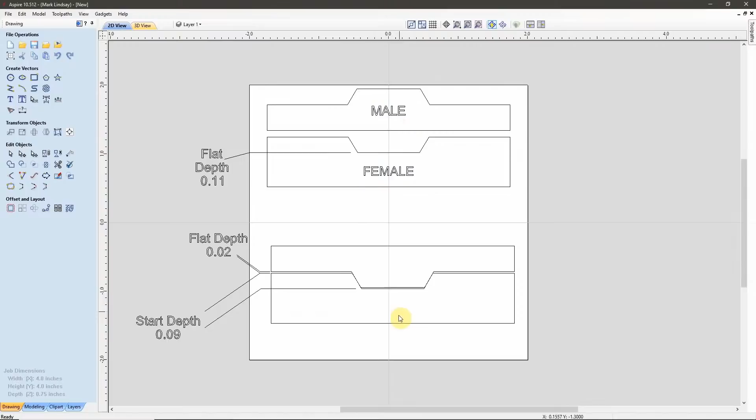The thing to remember is the only pieces of this inlay that are actually glued together are these angled surfaces here that are created by the V-bit. These are the only surfaces that actually make contact. These gaps here down on the bottom of the female and at the top over here on the sides serve 2 functions. Number 1, they provide clearance so that this surface of the male portion of the inlay and this surface of the male portion of the inlay do not make contact and interfere with this portion of the inlay seating itself fully within the female. So these gaps are created to keep these surfaces away from the female.

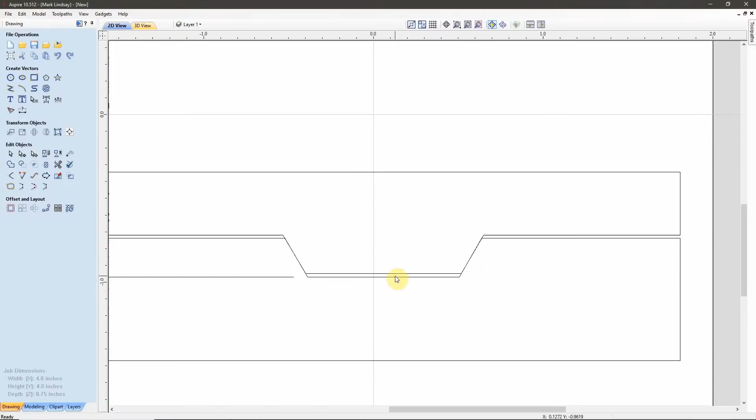They also serve a secondary function in that they're an escape route for excess glue. Glue being a liquid can't be compressed, so it has to have an escape route. It has to have somewhere to go. Otherwise, we won't get a snug fit. So, by having these gaps up here at the top, any glue up here close to the top surface will squeeze out in this direction, and any glue down here closer to the bottom will be squeezed down into this little well formed by these gaps.

Where the confusion comes in is how to create these gaps and what measurements to use. Well, in my case, with the material for the male portion of my inlay only being 1/8 of an inch thick, I need to leave a little bit of material here so that I have something to clamp into the female when I go to clamp these together.

So I have decided that a flat depth of 0.11 within the female will give me enough of an inlay surface that these surfaces here will make full contact, and there will be enough meat, if you will, to make it a secure inlay. And it'll still leave me enough material here on my male to clamp together. So that has determined the flat depth of my female, 0.11 inches.

Now, how did I determine the width of my gap? Well, I didn't. Those who have gone before us in creating VCarve inlays have experimented with various gap widths here, and by mutual agreement, they all agree that 0.02 of a gap here and here is more than sufficient to allow the glue to squeeze out, yet keep the surfaces of the male portion of the inlay from interfering with making full contact on these angled portions of the inlay.

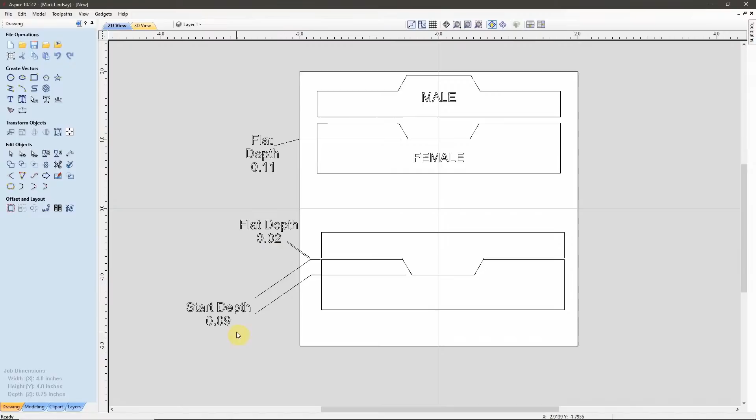So, from here, it's simple math. I want to use a flat depth on my female portion of 0.11. I want to keep a gap of 0.02. 11 minus 2 is 9. That means that I'm going to have 0.09 of an inch of material measured from the top surface down to the bottom of the male portion. That's how much material is actually going to be inlaid. So, 0.09 plus 0.02 is 0.11.

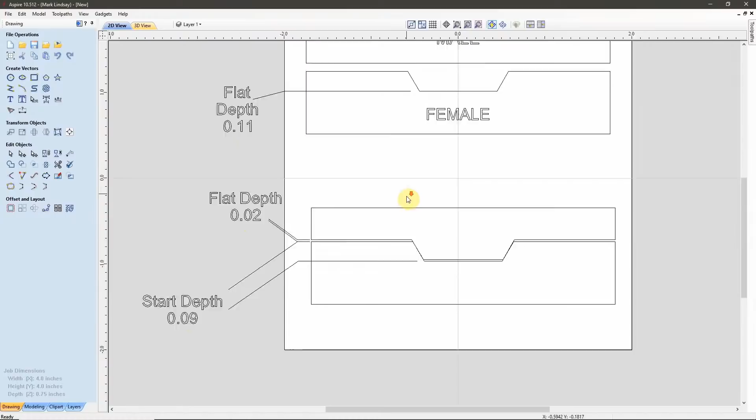This will become critical when we go to do the male portion of the inlay. For right now, in designing the female portion of the inlay, we only need to know our flat depth. So let's go back over to our female portion and let's start the toolpath. For that, we'll select all of the vectors, go over to the Toolpath tab, and I'll do a simple V-carve.

I want my start depth to be 0. So I'll set that to 0.0, and I want to carve to a flat depth of 0.11 of an inch. I'm going to use a 60-degree V-bit for this inlay. I want to use a standard bit that I know and that I've used before, so I'm not learning a technique and a tool at the same time.

I'm going to use clearance tools because I want to clear out as much of this inside here as possible. Now I have some large areas and I have some smaller areas. So for the large areas, just for speed, I'm going to use a 1/4 inch end mill. And if I select that end mill, I'm going to ramp in the plunge moves over a distance of 1/2 inch just to make life easier on the bit and on the machine.

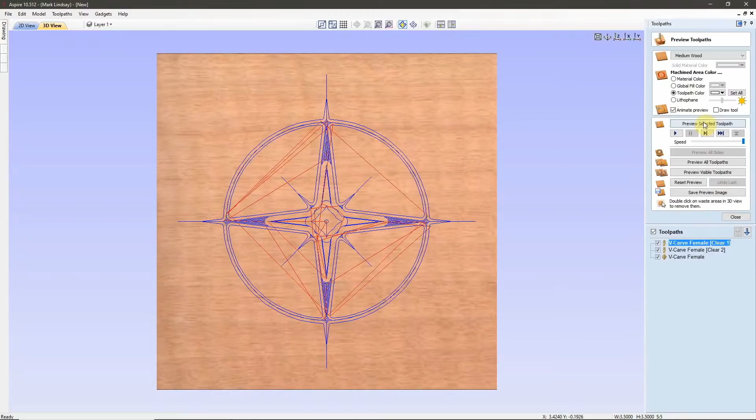And we see that it's created 3 separate toolpaths. Clearance 1 uses the 1/4 inch end mill, Clear 2 uses the 1/8 inch end mill, and VCarve uses the 60-degree V-bit. I can now preview these toolpaths. We'll start with clearance 1. And we see what it clears out. I'll come down and preview the 1/8 inch end mill toolpath, and that cleared out a bit more.

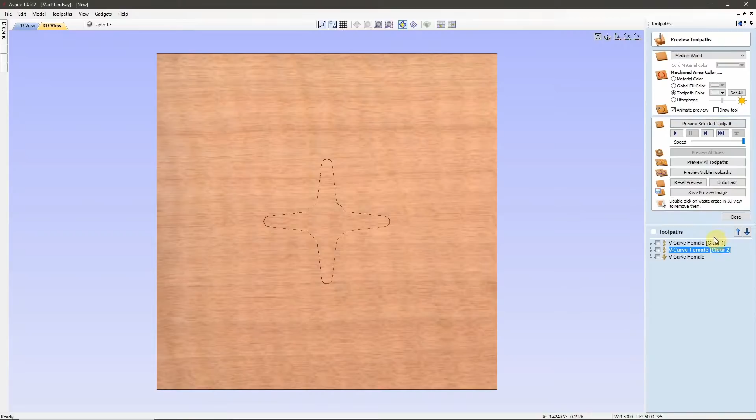Then we'll come in with the VCarve toolpath, preview it, and we can kind of rock this back and take a look at it. And we see that we have our deep V out here in this area, and we have some cusps left behind by the V-bit. Now, I could tighten up the stepover to reduce the height of these cusps, but I think we're going to be okay with this.

Before I glue anything together, I will dry fit, and if it appears that I'm making contact down here, I can come along and clean these up with a small file or emery board or even a pocket knife, because this down here is not critical. It will never be seen. So we can go ahead and back out of there, and believe it or not, I'm ready to save G-code for the female portion of this inlay.

So we'll go ahead and close my preview window, and I have my VCarve female toolpath selected. I'll come up here to Save Toolpath. I have selected toolpath checked up here, and I want to look in my list and make sure that I've got the correct toolpath listed. I have my post processor set. Now I'll save this toolpath, and I already have my flash drive in my computer. I've made the correct folder, and I have folders for male and female, because this will require separate G-code files.

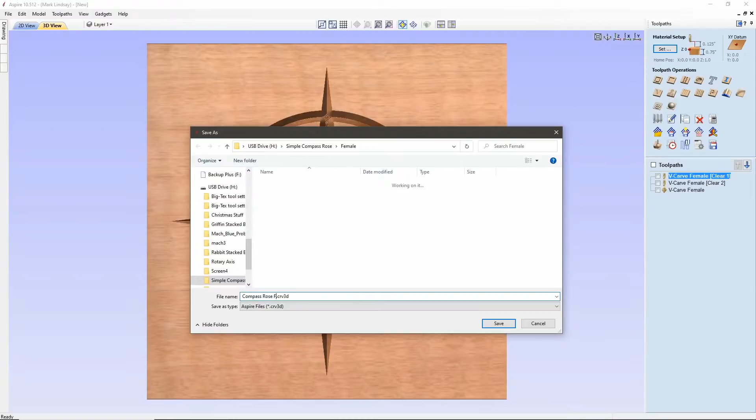Now I need to save the file. So I'll come up to the File menu, Save As, and I'll go ahead and save it in the same folder. I'll put compass rose female, and save my file.

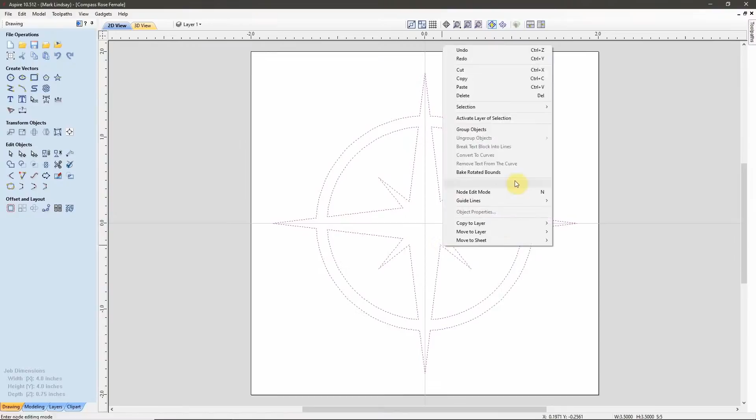Now I can come out of the toolpath tab, come back to my 2D view, and much like I did before, I want to copy these vectors and use these vectors for the male half of this inlay. So I'll select all the vectors, right-click, select Copy, come down to a new session of Aspire that I have set up to be the male portion of the inlay. Right-click, paste. And again, the first thing I want to do is hit F9 on my keyboard to make sure it is centered, and it is.

I want to check my object size. It is correct. And now this next operation is critical. Even though this is a symmetrical design and the left and right should be identical, there may be a slight difference. So I want to reverse this image. I want to mirror it horizontally. That way, when we go to fit together the two parts, I'm assured that if there's any kind of a difference over here in a corner somewhere, those differences are on the same side when we go to make these pieces together.

So I'll come over here to Mirror Objects. I want to flip about the job center. I do not want to create a mirrored copy. I want to flip these vectors here. And I'll click Flip Horizontal. Now we saw a slight difference. There was a little bit of a shift out here. But now I'm certain that any differences that are on the left side of the female are also going to be on the left side of the male when we mate them together.

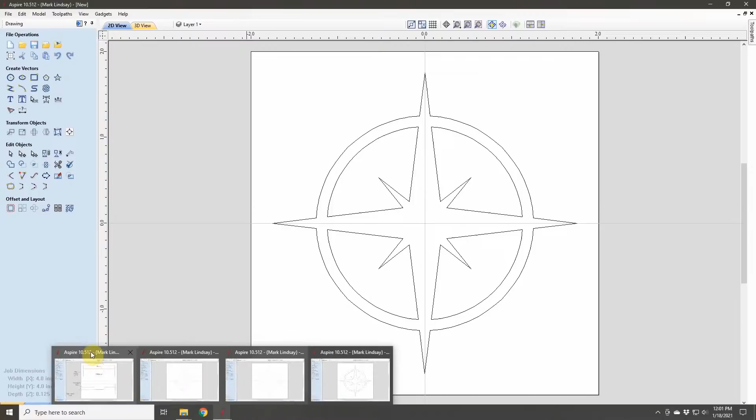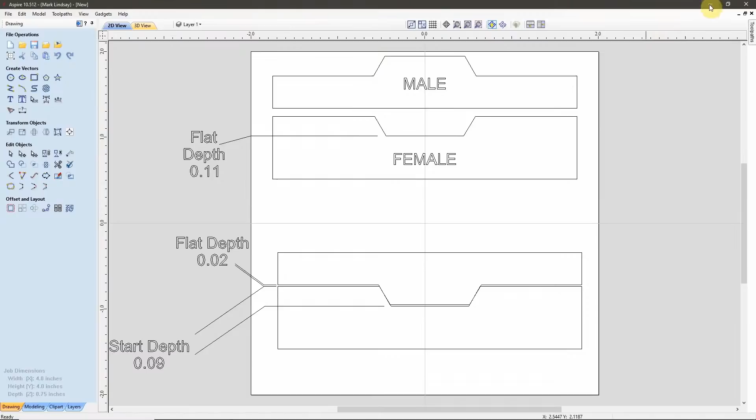To create our female portion of the inlay, we did a simple interior V-carve, meaning we carved away the compass rose. To do the male portion, we're going to do a reverse V-carve, meaning we're going to carve away all the rest of the material and leave that compass rose. So in order to do that, what we need to do over here is create a vector boundary. We'll select that vector boundary and we'll select the compass rose, and the software knows to machine away all of the material around and within the compass rose.

So, to create that vector boundary, the easiest way I've discovered is to create a simple rectangle. And I'll show you a little trick here. My material is 4 inches square. Well, when I want to create a rectangle that's the same size as the material, I'll select my anchor point, which will be the center of the rectangle, and my X and Y 0. Regardless of what's in these boxes here, if I want to make it the same width as my material, I'll highlight whatever is in there, and I'll type X and tap the equals button. Down here, I'll type Y and tap the equals button.

That takes the measurements I have entered in Job Setup and puts that X dimension here and the Y dimension here. Now I know that I'll be creating a rectangle that's the same size as my material. I'll click Create, and it doesn't look like anything has happened. If I close this, come out here and select, we can see I have a vector the same size as my material around the material.

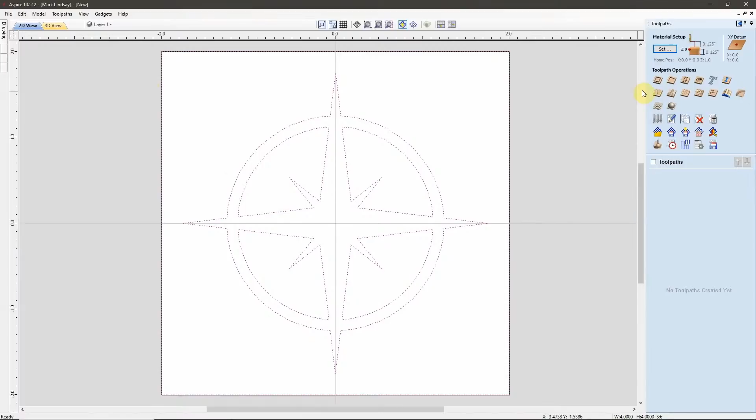So now I'm ready to start toolpathing the male portion of this inlay. So I'll select all of the vectors, come over to the Toolpath tab, and again, we're doing a simple VCarve toolpath. I'll select that, and now is when we need to look at the numbers we have written down, our start depth and our flat depth.

That being these numbers here. The gap that we want to create here of 0.02 is going to be our flat depth, meaning with a start depth of 0.09, when we hit cycle start, the bit is going to come over and it's going to plunge in that 0.09 and start from there, then go the additional 0.02 to cut that 0.11. This 0.02 flat depth is the thickness of this gap.

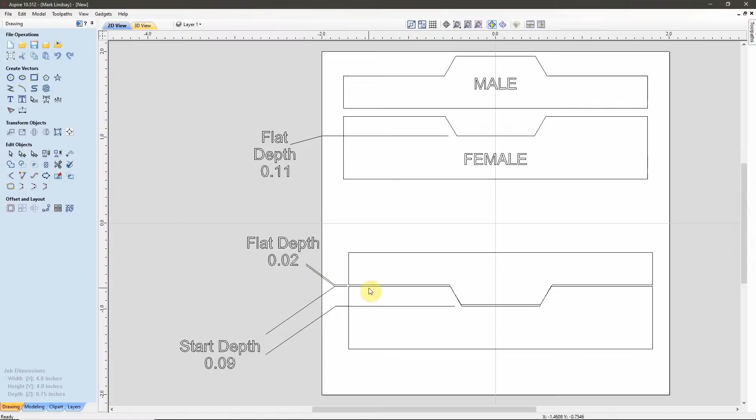Let's go back over to our male inlay, and we'll put that information in up here. Our start depth is 0.09. Our flat depth is 0.02. I'm using the same 60-degree V-bit, and this is crucial as well. Regardless of which bit you use to cut your female, use the exact same bit to cut the male.

Measurements of V-bits are nominal. This says 60-degree V-bit. The bit I select outside in the shop may be 59.5 degrees. It may be 58, it may be 62. To eliminate any possibility of an error, it is crucial that you use the same bit to cut both the female and the male. So I'm using the 60-degree V-bit here, and I'm going to use the same 1/4-inch end mill for this clearance pass, and the same 1/8-inch end mill for this clearance pass.

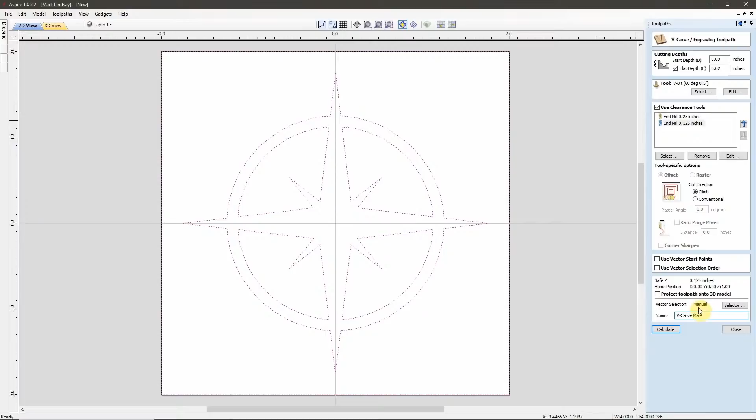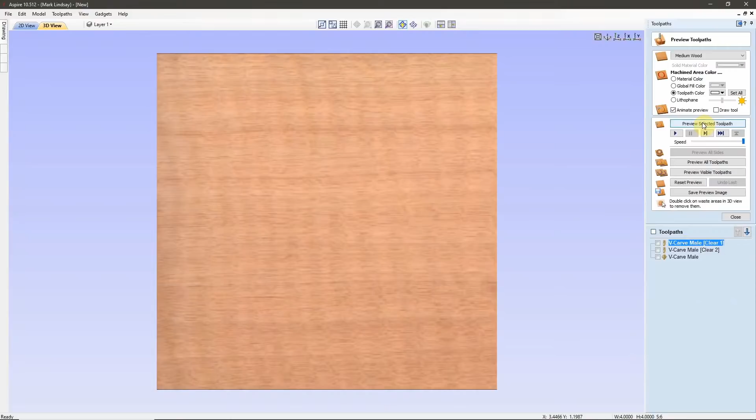We'll call this VCarve male, and we'll calculate this toolpath. And it's rather busy because we're machining away the outside of the material here. So we'll go ahead and uncheck that, and I'll select the first clearance pass. We'll preview it now. And with our first toolpath complete, we can kind of rock this back and take a look.

Now, for those of you who have been wondering, this is why I selected the 1/4-inch end mill. Not only is it going to clear away the majority of the material, but it being the most robust bit of the arsenal here in this project, it's going to do the lion's share of the work, meaning it's going to take care of most of this material and make it easier on the 1/8-inch end mill and the V-bit.

Because now the 1/8-inch end mill only has a few little corners here to clean up, and the V-bit will be more than capable of handling the rest. So that's the reason I chose that 1/4-inch end mill, was to mill away the majority of the material to make life easier on these other two bits.

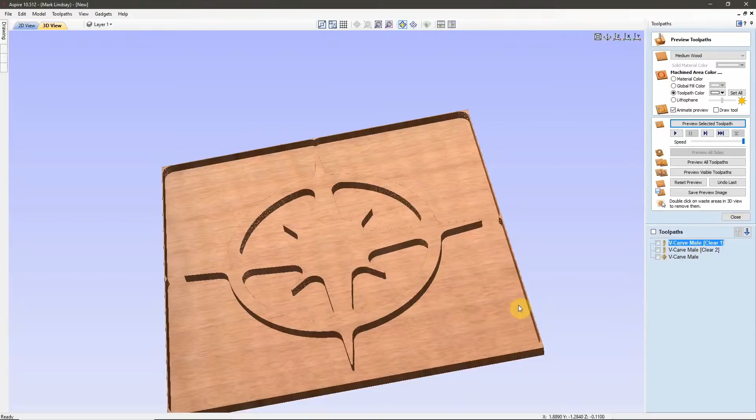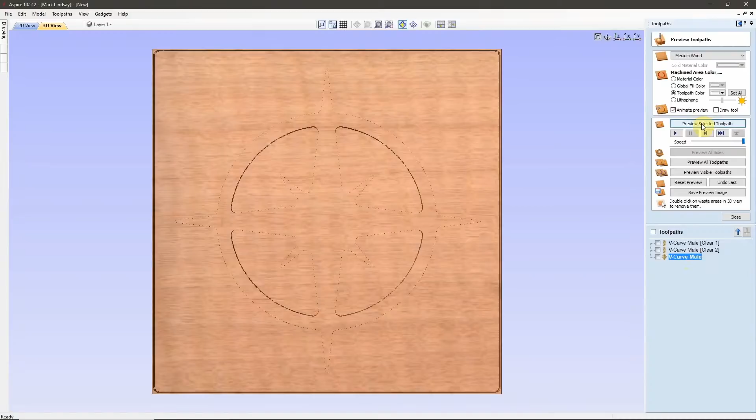So let's go back to a straight Z view, and we'll preview our 1/8-inch toolpath, which isn't much really. It's basically cleaning up these radii. And we'll preview that toolpath. And we can see that didn't take long at all. Now we'll go ahead and do our VCarve toolpath, and that has come along and basically just added these angles.

Now, something to pay attention to is if we look at this preview, and I'll compare it to our female preview in just a second, we can see that we've got these flat areas here. It does not come to a sharp point. It does out in this direction here, and that's fine. That's what we want. But the center section here and the bottom of this ring and where it meets this point of the star are all nice and flat.

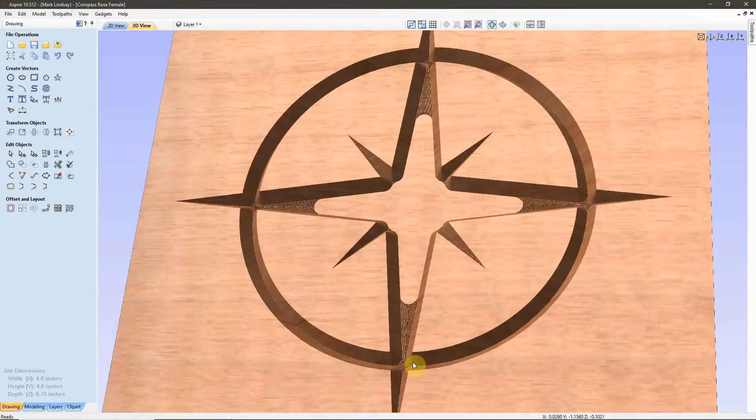When we compare that to the preview of our female, we can see that the V-carved circles here, we have that sharp angle. That lets us know that we have clearance out around here. The male is not going to bottom out down in our V-carving here. Again, these are fine right here. But we want to make sure that we have this clearance down here for glue to escape when we go to clamp these together. So, this is looking good.

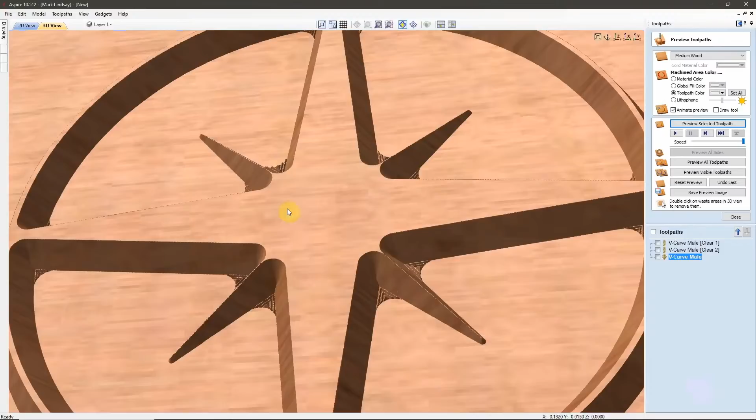Yes, there are, again, a few cusps here in the corners where the V-bit cleaned up. But again, should we need to, we can come in and kind of clean up these cusps if we feel that it's interfering with a good tight fit of the male into the female. So, with this portion done, we can go ahead and save G-code for the male half of our inlay.

We'll go ahead over to the Save Toolpath form. And again, I've got my VCarve with the 60-degree V-bit toolpath selected. It's listed up here. My post-processor has not changed, nor will it. And I'll click Save Toolpath. And now I'll need to navigate to the correct folder. We're working on the male now. And I will name this 60-degree V-bit VCarve male. Save that G-code.

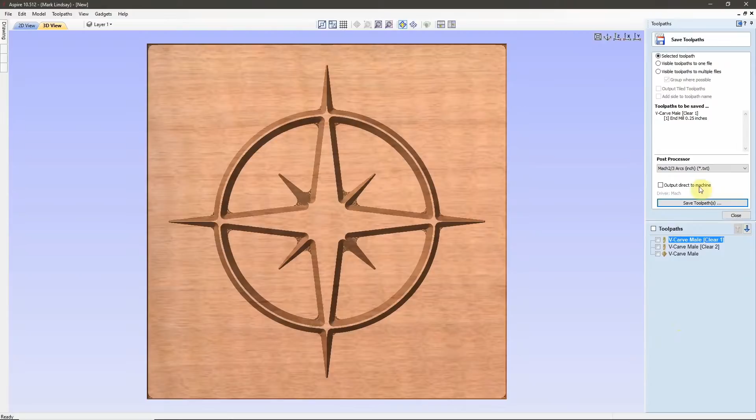Then I'll select my 1/8 inch end mill toolpath. Click Save Toolpath. And this is 125 end mill VCarve male clearance 2. We'll save that G-code. Then I'll select my 1/4 inch end mill. Make sure it's listed up here. Save toolpath. And I'll call it 0.25 end mill VCarve male clearance 1. Save that G-code. Now I'm ready to go outside and carve my first VCarve inlay.

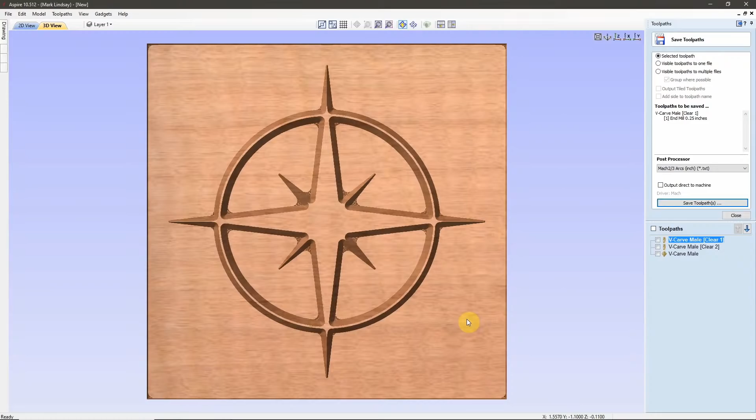No, I'm not. Todd, help!

Mark, that was really good. Thank you for that. You did a fantastic job explaining all about how to create your first inlay. So, full disclosure here, that was Mark's first inlay, and you can see my first inlay over there ever. So this is my second inlay that we're going to be working on, and I'm going to be using Mark's files to actually cut the sample that he would have cut on his CNC if he wasn't in the middle of a huge renovation project, which I'm really excited to see how it turns out for him.

So, like I said, the first one I ever made is up here in the corner. It's a pencil box that you can download for free from your Vectric account. And in the package of files you get, there is this cheat sheet, which is a lot like what Mark showed you in his video, and it describes how the parts interact with each other, how you need to create the male part and the female parts, and how the flat depths and so on work.

And you can see here, like Mark had pointed out, that you want it to marry up nice and tight so that the sides of the V carving, that taper, actually are the parts that rest together nice and tight. So when you end up surfacing off the top of it, you don't have any weird gaps in there. So if you're a first timer at doing VCarve inlays, I'd suggest you go download the pencil box and keep that PDF nearby, because there's a little bit of formulas and stuff there. It really helped me with my first inlay. So again, thank you, Mark, very much.

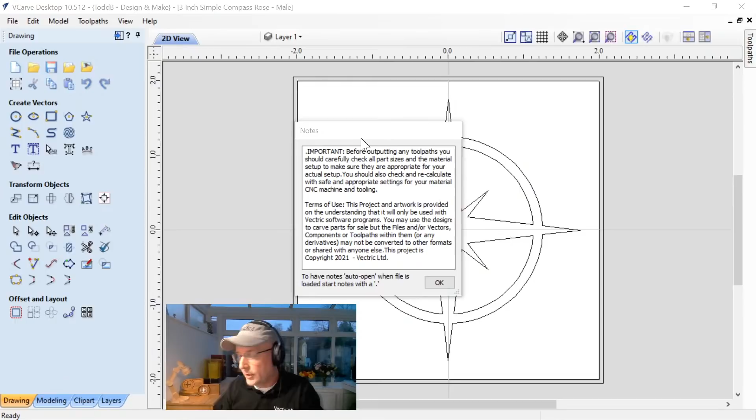And as always, you get this warning that pops up. Make sure that you read and understand this. It is really, really important. And that will come in a bit later when we talk about different ways of cutting this and tooling it up. But make sure that all your toolpaths have been adjusted and are safe and appropriate for your machine, the wood you're working with, and the tools that you have on hand. So I'm just going to click OK.

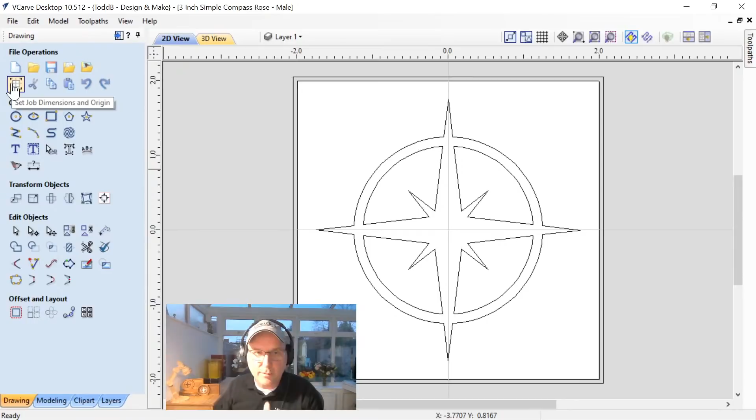So to start with, the first thing you should do every time you download a file from us is take a look at the job setup. Now, I know Mark just went over that, but we're going to pretend that we didn't see that video, okay? We know it's a single-sided job. These are the dimensions that he outlined for his material and his setup. He's zeroing off the material surface. His datum is set to the center. Now we're not going to adjust this right now. We're just going to check it over so we understand how his file is set up.

We are going to look at, he uses the standard or fastest setting, which, there's no 3D content in here, so that's perfectly fine. And then a solid color for his material, which is great. And instead of clicking OK, we're going to hit cancel. We don't want any recalculation of tooling. We just want to go ahead and press cancel.

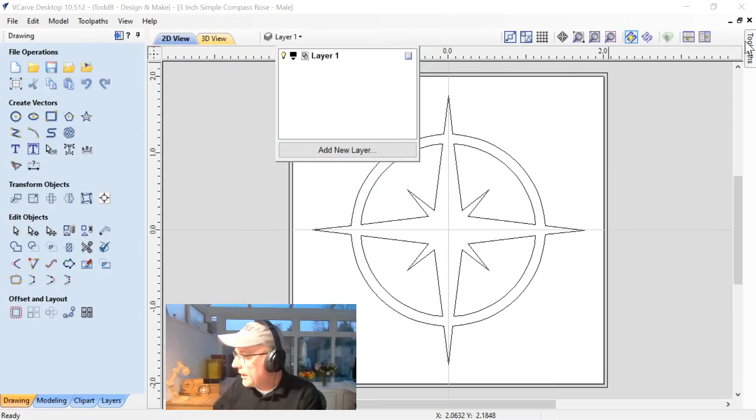Take a look at the layers, of course. There's only one layer. That's perfect. That's exactly what we want. And then we can have a look at his tool paths. Now, I forgot to tell you that we're only going to take a look at the male part of Mark's job, because everything we're going to look at is kind of the same. Like he said, you're going to mirror back and forth your tools, so it shouldn't be that much of a challenge for you in the end.

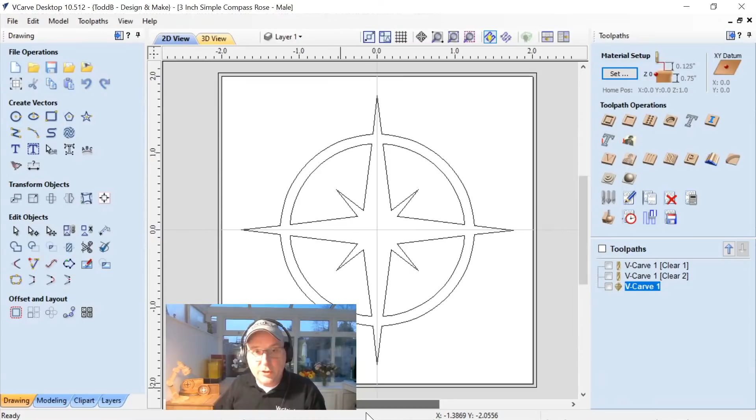But again, when you're downloading one of these from us, you should take a look at these files inside and out. So let's go ahead now and check his material setup and make sure it's exactly what we expect to have happen. The thickness of the material, again, the datum set to the center. Zeroing off the surface, and we also have our model position right at the very top of our material. Quite often this isn't the case when you're looking at 3D content, so if you're using 3D content, make sure you're checking that the model is where you want it to be.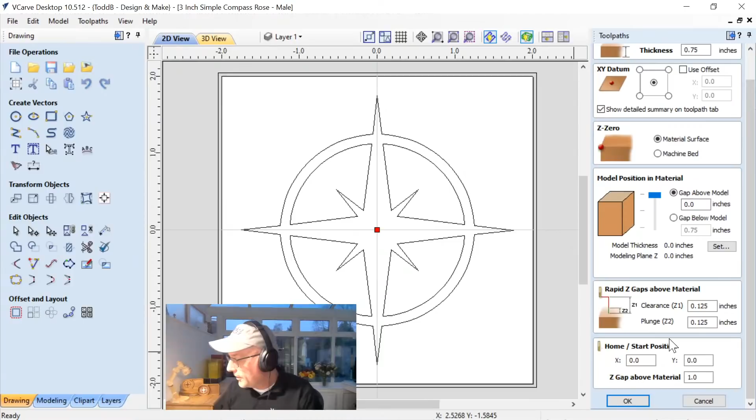There is no model, so we're just going to work off the top of our material here. And then again, these settings here are what are safe and appropriate for his machine. So you're going to have to change these when it comes around to you actually recalculating the tool paths and saving those out. Okay, so I'm going to cancel that. And then we can take a quick look at his tool path.

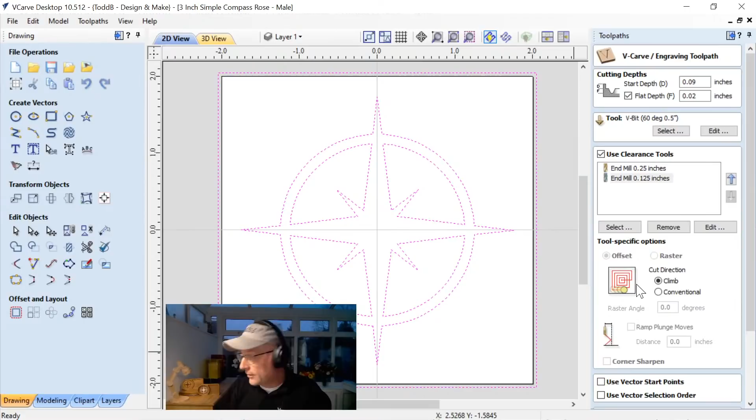Now, like he said, this is a V-carving tool path using the clearance tools in there to help clear out some of that material that we don't want to waste the time cutting with our V-bit, which could be quite timely, right? Because it's quite a small step over. So we want to be able to take advantage of this particular feature. So again, we have our start depth, our flat depth which Mark explained, and again in that PDF that I showed you, you can get another explanation of how that's done.

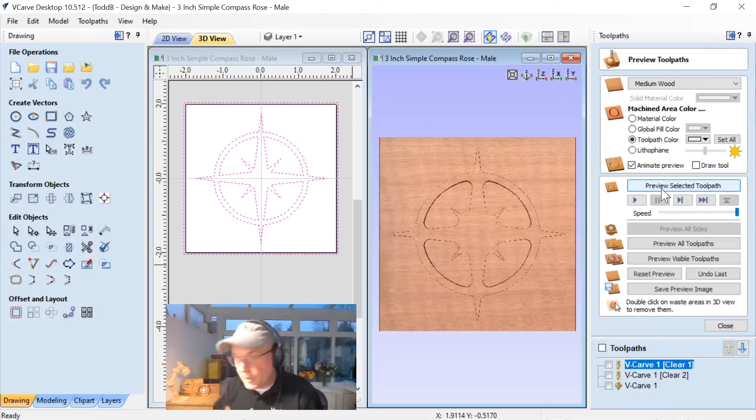He uses his V-bit 60 degrees, like he said. He's got his two clearance tools, and everything looks great here. So we can go ahead and click close, and then one at a time, we're going to go through and preview those tool paths, okay? So that we know exactly what's going to happen when we adjust these for our own machine. So let's have a look at the first tool path. We're going to preview that selected tool path. Here we are. It's going to do that big clearance with that 1/4 inch end mill for us.

Let's have a look at the other one. So it's going to do those little bits in there with the 1/8 inch end mill. And then we're going to have a look at the, oh, sorry about that. We're going to have a look at the V-carving bit. Anyway, there we are. So that's exactly what he expected to have happen. It looks great. As he pointed out, you got these nice flat areas, which are important. I'll point those out again a little bit later, but they are there so that you're actually going to bottom out and there'll be a bit of a gap in there, which is great.

Now what I suggest you do is take this file and save it under a new name. Maybe it's Todd's Edit or whatever. Well, use your name, not mine. And go ahead and save that off. And then you can go ahead and mess around with that one. And you always have the original one that we provided for you, or in this case, Mark provided for you, to go ahead and muck around with, okay?

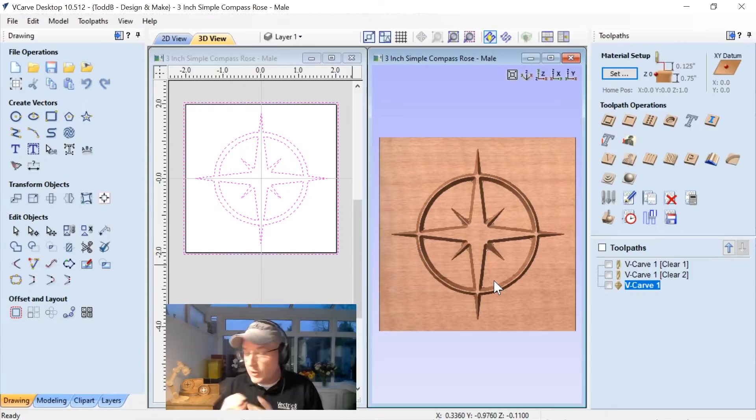So that's pretty much what I'd expect you to do when you get a file from us. Going in and changing all those things is pretty easy. You can go ahead and take a look at the actual job setup and make the adjustments that you want.

Okay, if I want to go ahead and move my datum to the bottom left, which is great. Maybe I want to use Canadian maple, because you would, right? That's right, eh? And then you go ahead and click OK, and it's going to ask us to recalculate all our toolpaths. You can just say OK, and they're all recalculated.

We're going to go over to our material setup, and again, make sure that you change all of these settings down here so they're safe and appropriate for your machine, and then click OK. And then you can go ahead and pop into these toolpaths and change up the tools that you want by selecting tools out of your tool database that match up.

Now, because you've got two files, right? You've got your file and his file. When you go ahead and preview your toolpaths, you can actually have two instances of VCarve or Aspire, whichever you happen to have open, and you can have a look at them side by side and make sure you're going to get exactly what you expect just with your own tool setup, okay? So that's pretty much it. And what you could do is go into the other, the female file, and change it up if you want to, okay?

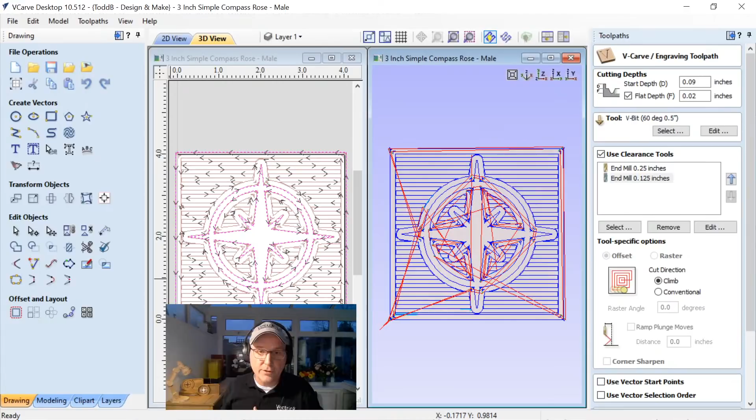So now, I took those files after I had edited them up and took them into the labs, and I quickly cut the files at the end of a day. And so here you can see this is the female portion of the inlay, cut like a treat, and it's perfect, no problems at all. You can see a little bit of a plateau in the center of the star, but that's probably because either my material wasn't flat when I zeroed my tool, or our zero plate's a little bit wonky, so maybe I didn't quite get it flat like it's supposed to be.

So there's a little bit there in the bottom, but overall, I think it's a really nice cut and it worked really well. I did have to go in with a knife, like Mark said, and pop out some of the leftover material there from the V-bit, but that wasn't any big deal. I used a little bit of sandpaper and sanded that out, and that was great. So that worked out really well. Not so much the case with my male part. This is not a problem with the tooling at all.

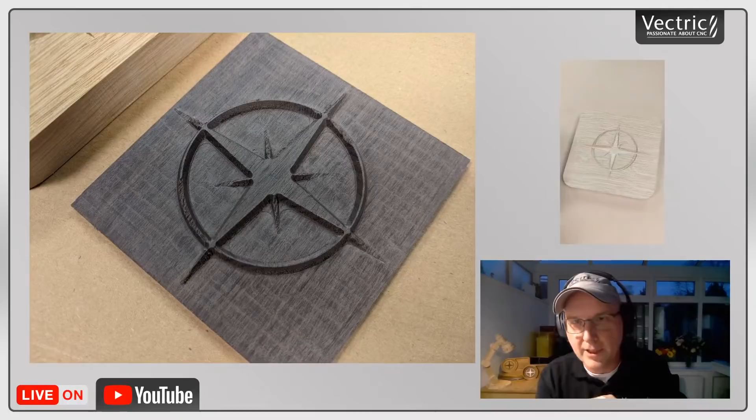And so when I had a look at this, you'll see the little video will play up there. The female part turned out really well. Cutting it, no problems at all. There's some chipping going on. Seems to be where there's thin areas and they run against the grain or with the grain. It kind of chipped, it was a real problem. I did have the flat area on the top like I expected. And it kind of chipped a bit. I wasn't quite sure what to do next.

Like I said, at the end of the day, my cutter wasn't the best, the bit may have been dull. But one of the good things that did come from this, I could test fit the male part into the female part, and it actually fits perfectly, which was great. So I knew that the math was nice and snug. Everything works out perfect. It's just the material. So I came home and sent Mark an email, and we went back and forth about this little problem, and came up with some ideas to try, like changing my feed rate and the tool I was using. Sometimes different variations seemed to make things better, sometimes they didn't.

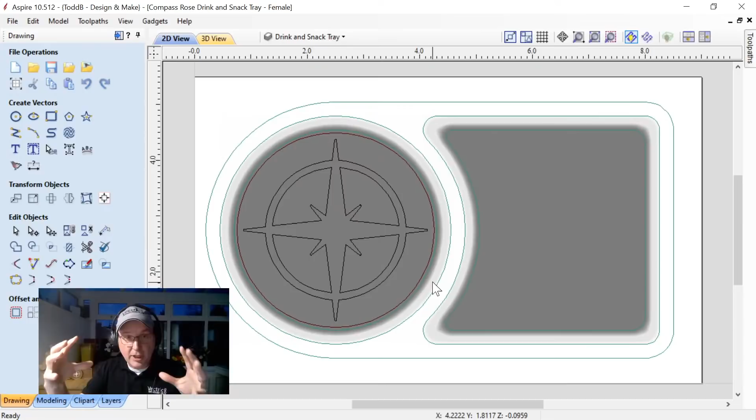Actually, I used his original file and his tooling, the one that I had changed up and so on. I just made a larger job space and created this job here, which is, like I said, a little bit of a snack tray. If you take a look at my job size, it's 9 by 5.5. Let me just move myself out of the way here so you can see it better. 9 by 5.5, and the thickness is 0.97 of an inch. I knew the material that I had was pretty thick, and so I wanted to use that.

We're going to zero off my material surface, change the start point to the bottom left. I chose very high. It's hard to teach an old dog new tricks because I use 3D content a lot. It makes sense to do that, but I could have chosen to use the standard if I wanted to without any problems, and then Canadian maple.

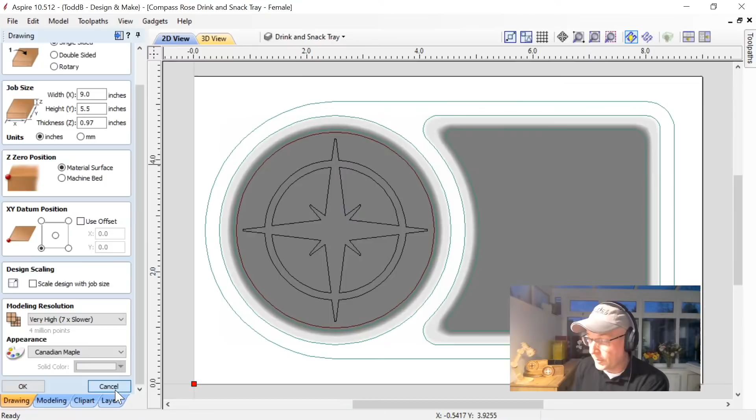Okay, if we take a look at the actual layers that we have, we've got the inlay, the borders, and the drink and snack trays. So if we turn these all off, we've got Mark's inlay, which I copy and pasted in. We've got the border. I'll talk about that border in a second. And then we actually have the actual drink tray vectors in the end. Okay, and then we have our toolpaths.

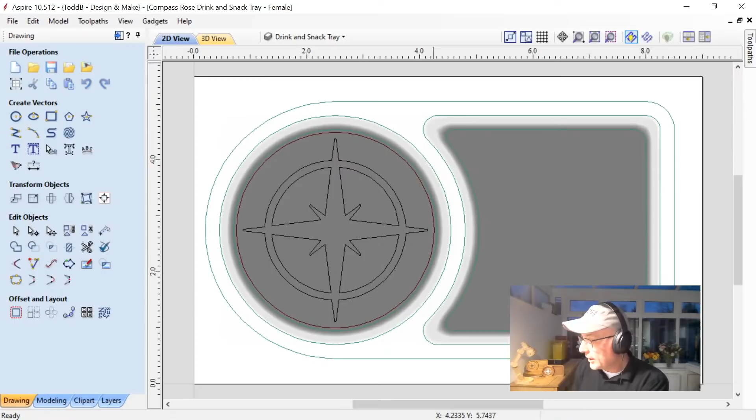So one of the things I decided I was going to do when I was having all those issues with Mark's file, I decided that I would go in and actually fillet the ends of all of these really sharp points. So I filleted those 0.0156 of an inch. And I chose that number only because it looked good in the end. There was no particular reason why I did that.

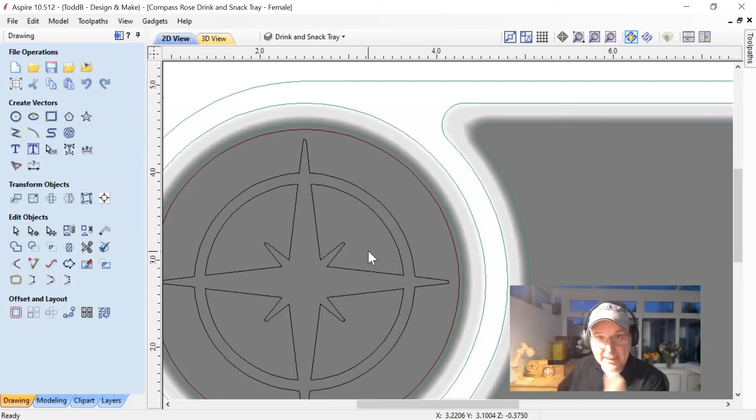I used our fillet tool. I went in and I just filleted the end of those really quickly, and all of these sharp points, and that seemed to help out a lot. So that's the first thing I want to point out to you, the actual edit of Mark's work. Again, I can use these vectors. I can copy these out like he did into my male part file and have those ready to use exactly as they are. Make sure I flip them and all that kind of stuff like he had showed you.

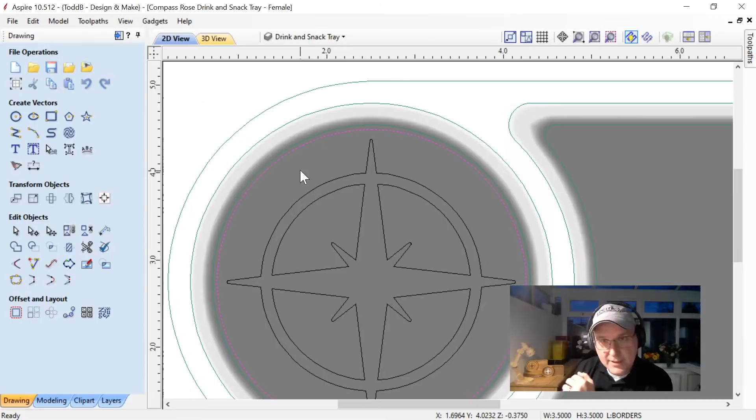This line out here is going to be the border that I'm going to use to cut the actual male insert. I had to make sure that I had a vector there that's slightly smaller than the dish that I want to set it inside of. Okay? And if we look at the 3D view, you can see that I created these dishes that are here. Now, these aren't clip art dishes. These are actually created very simply with one of our shape editing tools built right into Aspire. So let me show you quickly how I did that.

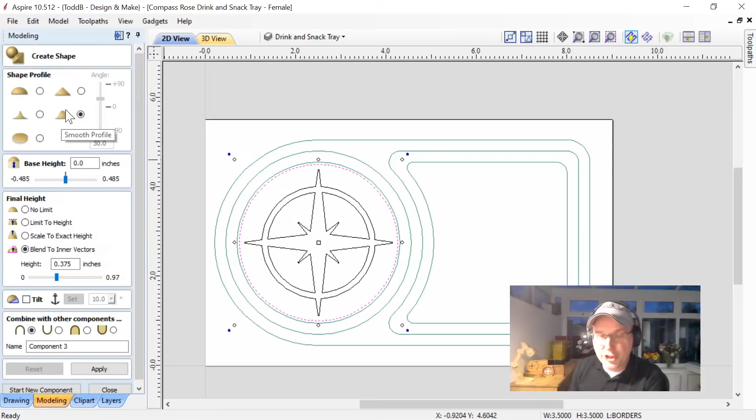We'll go back to our 2D view for a second, go over to our modeling tab. I'm going to create a brand new level, and I'll hide this first level, and I'll make sure I have this selected, okay? If I go into my shape creation tool here, we have this new feature that came in with 10.5, and what it does is it creates a shape and it blends it to inner vectors. So we can have two different vectors, and we can blend this kind of S shape and create a flat bottom dish. And we can demonstrate that by choosing these two vectors.

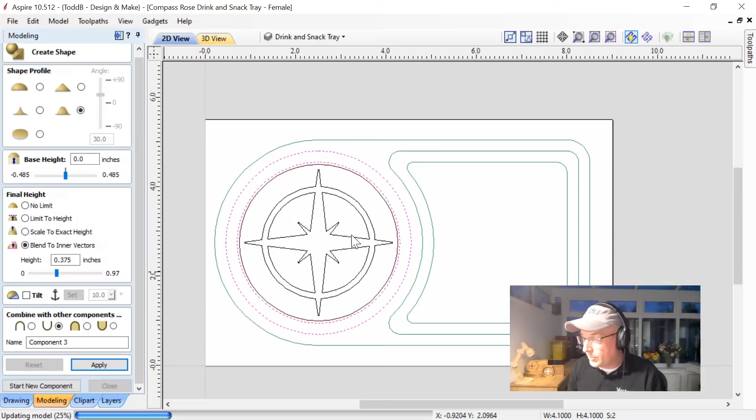Okay, we've got that selected. We have no base height. We're going to blend to our inner vectors. That's the height of our inner vector. But in this case, it's not our height, it's our depth, because we're going to go ahead and subtract that. And if we click apply, you'll see that in our 3D view, we have a nice dish, and it's got that sort of S shape to it, which looks really good.

Now, you'd think that's fine and dandy, Todd, that's perfect. I can just bring in a 3D component. I can make that shape without any problems at all, or I can use a 2-rail sweep. Go ahead and use a 2-rail sweep if you'd like to. That's a perfectly good feature to use, but this just makes it a little bit faster. Yes, you could use that 3D content, and if you have VCarve Desktop or Pro, then you could create a version of this using some 3D content, some dishes and so on, and you could do that as well.

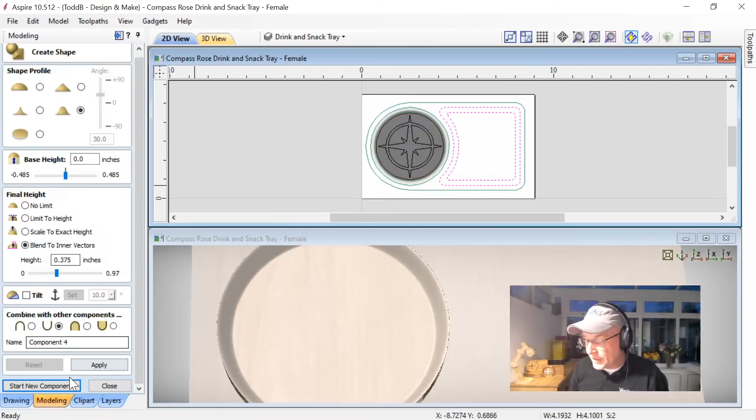So that's perfect, but you certainly couldn't create this shape over here. So if I choose those two vectors again and go ahead and use my same settings and click apply, you'll see that now I have this other dish, and that's where I can put my peanuts, my cashews, or my chips if I'd like to, whatever it happens to be.

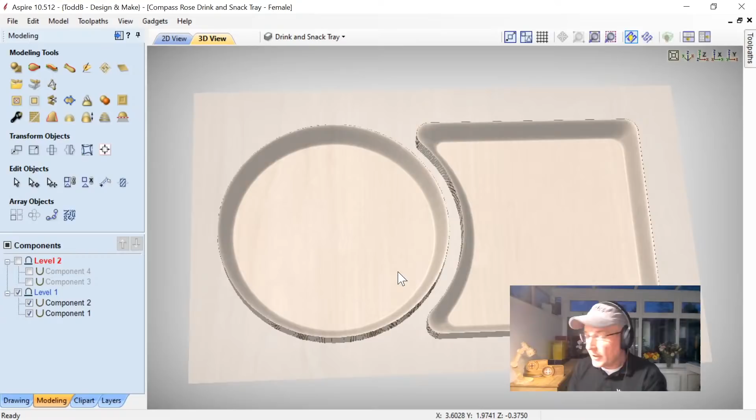Okay, so let's hide this and then go back to our original ones that we had here when we came in. So again, that's an Aspire only feature, and off we go. So I've got all the bits I need now to make my tray. I've got all the vectors I need, and I have all of the components I need. Let's move myself to the center here. See a little bit farther over maybe. And let's have a quick look at the tooling. So let's bring that out here and have a look.

Now, I'm not going to go over all this tooling in particular because you should probably know how to do most of this, but what I've added to this is a roughing and a finishing pass, and those are based on these two regions here. Okay, so I'm going to use my roughing pass. I'm going to use a 1/4-inch end mill, get rid of all that stuff in there. I'm using my selected vectors, so I'm selecting these outside vectors here. No boundary offset. I don't want it to run up on top of the edge of this.

Now, one thing I did notice that I forgot to do was I could have added in a 0 plane, and that would ensure that I didn't roll off the edge by mistake. With these particular tools that I'm using, they're too big and they're not going to roll off the edge, so I was pretty safe. But I think that standard practice would be you should actually put in a 0 plane in there. Okay, something if anybody noticed out there, it's not there.

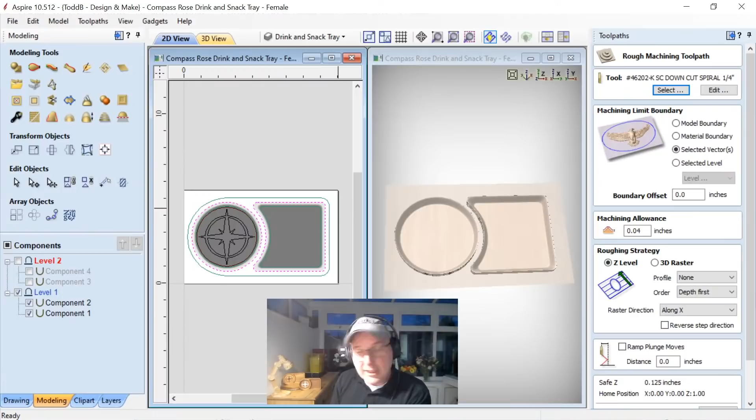I'm leaving a little bit of a machining allowance behind, and I'm going to use Z-level roughing, which is great. And there's the name of the thing, and so I can go ahead and calculate that. And we'll just wait for it to work its magic. Then we can preview that visible toolpath, and that does exactly what I want it to do. That's great. Go in and I can go ahead and do the finishing pass.

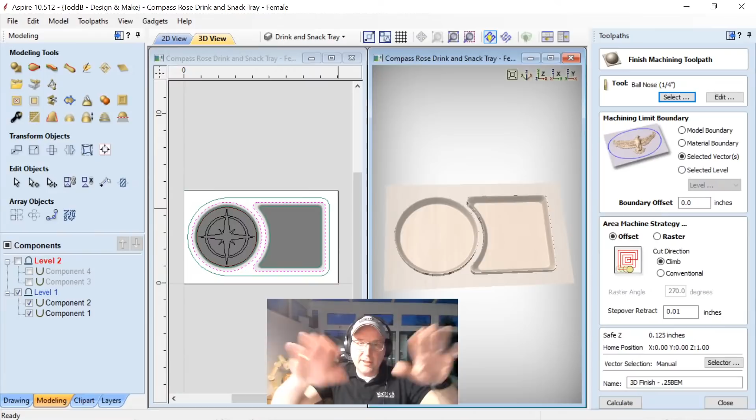1/4-inch ball nose, I'm using a really big ball nose end mill. Selected vectors again. There's no boundary offset. Again, I don't want to come outside of those shapes. I'm going to use offset tooling. I did that on purpose because I didn't mind if any kind of machining lines look like they're radial. They kind of come to the middle. That would look kind of nice in this particular situation. So offset tooling, and that's fine, and we'll calculate that up, and that all looks great. It'll take a second to do this.

Now, I wanted that ball nose end mill in there because I wanted to make sure those round bits at the bottom and the tops of those dishes were kind of smooth. So if we preview that, you'll see that we get those shapes that we wanted. Now, the next thing I want to show you is important. These are the tool paths that I made and I cut my sample with.

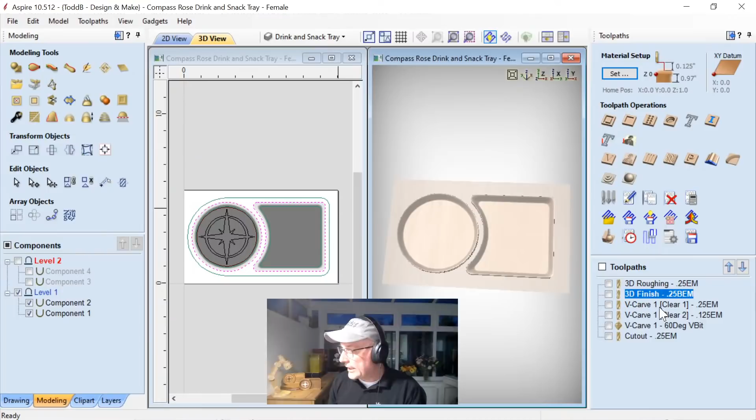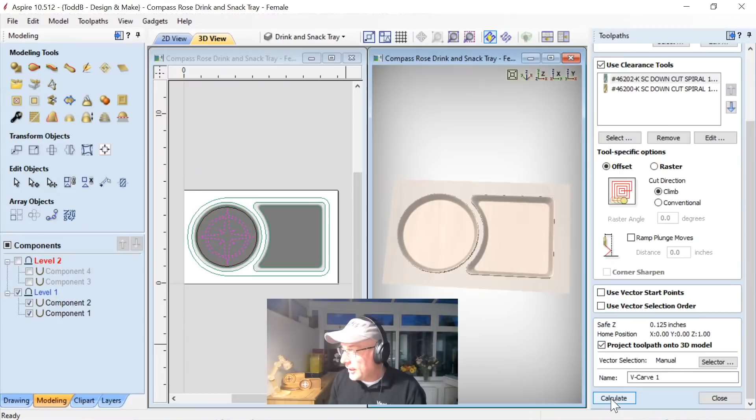So I knew that they were going to work, except I need to make sure that in this particular job, I get on the very bottom of this form and I project this onto my 3D model. If I don't do that, it will just go ahead and cut these at the top of my virtual material block, and there's nothing there. So I need to make sure that I project those onto the 3D model and then calculate that. And what you'll see is that they'll actually be lying on the bottom of that dish, which is where they should be. Okay? And I can close that, and we can preview those visible tool paths just like Mark had showed you. And there it is in the end.

And then we have our last tool path here, which is going to be our cutout profile cut with our tabs in there. And we can just go ahead and preview that visible tool path. And there we have our tabs in the bottom. I didn't need to show you that because I'm sure you've all done profile tool paths before. It's pretty basic, and added in a couple tabs, and that's great.

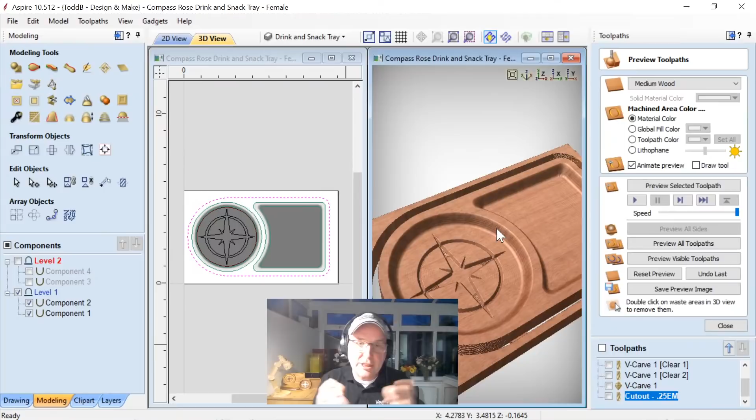So that's perfect. So there we have it. That is actually my female part of my snack tray. So let's have a look at the male part. So again, make sure you read and understand all the information that's here. It's really important. And when I talk about this particular part of this project, that is very important. And I'll show you in a second.

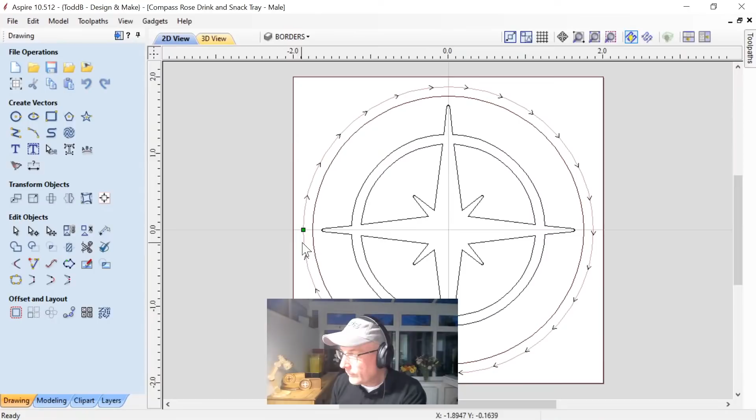So here we have our job. It's exactly like Mark had said. Okay, I set it up. I copy and pasted those vectors in from my female part to make sure they were exactly the same. There is that border vector that I talked to you before that we're going to use to actually create this round puck shape that's going to be the base of our male inlay. So it'll fit inside the bottom of our dish shape that we've created.

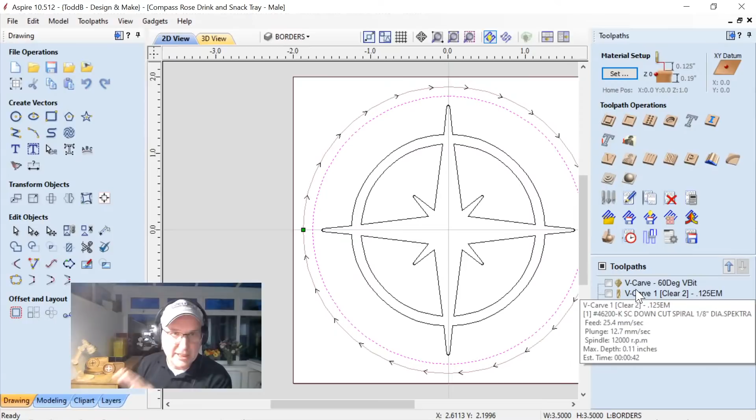And let's have a look at the tool paths for this. Okay, again, it's exactly what Mark had suggested, except for, like I had said, I reversed them. I decided to calculate them, and for my own use, I actually shuffled them around. I put the V-carve first, and then I worked down to the 1/8 inch clearance tool and the 1/4 inch clearance tool, and then my cutout pass, okay? And there was no need to project this onto the 3D component because there was none there. I just cut it as I did before, which is no big deal.

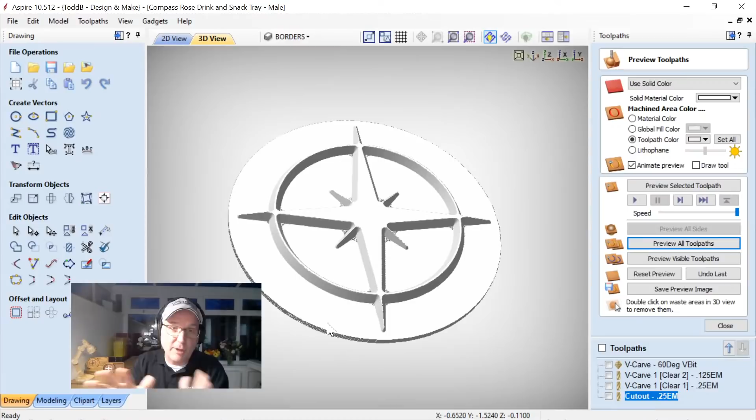So let's go ahead and preview all those tool paths right quickly here, and you'll see what happens. And there we have the end result. And I had used double-sided tape to stick this to my table with, so I knew that it wouldn't move around and shuffle or shift. That was my plan anyway. So there we have that. And again, you're taking a look at that. It has all the parts that Mark had pointed out. It has a flat top here. It doesn't come to a sharp point, and so on. And everything worked out in the software.

Everything looks perfect. Now, when I went to cut it, I ended up having a little bit of a problem, and that was my bit was broken, so it was chipped on the end. And I cut a couple of these, and I couldn't figure out why the male part had a very sharp top. And that was because I was using a shorter tool because the tip was broken, and that wasn't a great thing. And I noticed that right away on the parts that I created. And so we went back and did a little searching around, and we noticed that it was broken. I replaced the cutter, and then everything was great. So you can tell right off the bat when you cut your male part.

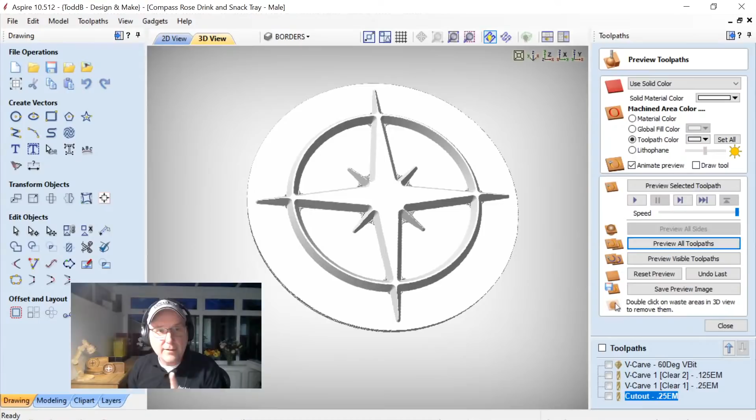Off you go. We're going to cut the male part first, then we're going to cut the female bits, so that way we can dry fit them together. And if anything is wrong, hopefully we can fix that. Okay, so let's go ahead and take those into the lab. Oh, I forgot one thing. I'm going to show you one more tool path that we didn't talk about, and that's the clearance tool path. This is the one you run after you've glued up your two parts, and you need to run and remove all of the base of your male part off.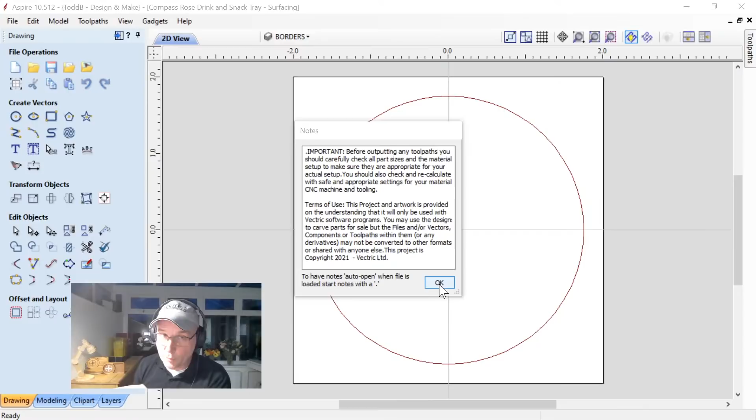Okay, so again, make sure you read and understand all of the stuff here. It's important. And let's have a look at the tool paths for this. Okay, now you're going to see there are 3 tool paths here. The first one is me cutting this with an end mill. I'm just cutting the bottom or the back side of this off down to the base of my dish. So this dimension is from the top of my material down to the bottom of the dish, okay? Because when I glue in this puck, it doesn't rise above the top of it. Or if it does, I'm going to be zeroing off a different part of my material, so it doesn't matter. I'm going down that deep.

I'm using an offset tool path for this first one. And any of you folks out there watching this, you know there's a problem with that. I'm cutting a circle from the inside and out, and there's nothing holding the edge of this in place in the end.

And so there's a chance that it can break off and actually twirl around the end of the bit, which did happen. So that's why I am giving you another tool path here to look at, which is the raster tool path, to surface this off. So depending on the shape of your puck, or the bottom part of your male inlay that you want to remove, you can use whichever one is fitting.

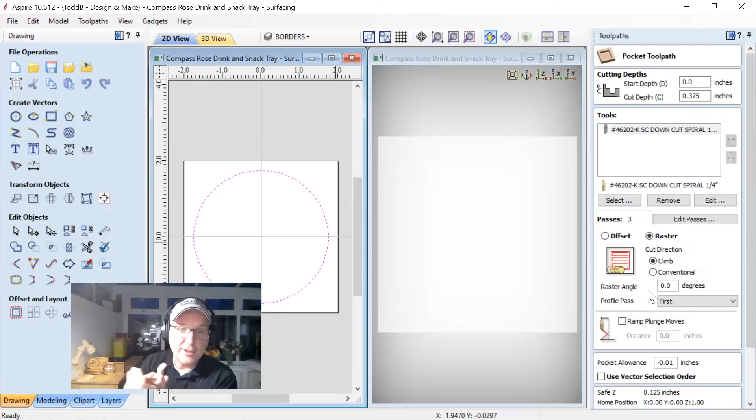Unfortunately, for this project, I had to try both because it was a bit worrisome when I saw the first one go. And so you can see that this one here will preview that tooling right away. You see that's working from the inside out. So at this last pass, when things start to detach, then I get this sort of ring of material that's going to not be happy.

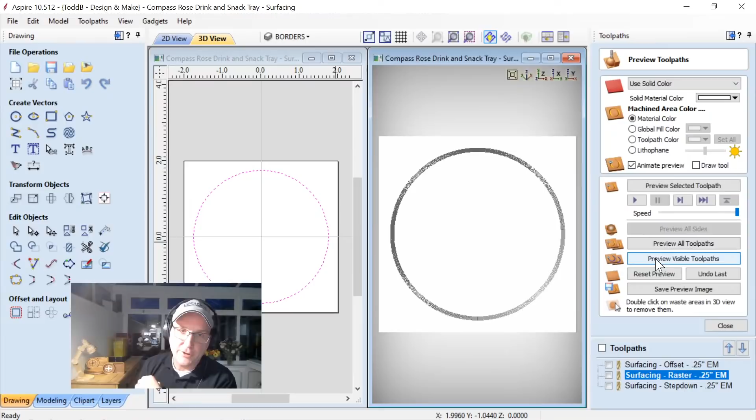So let's reset this, and we'll go ahead and try our raster back and forth. Smarter plan for this particular shape, which would have been great. And then there's this third tool path here. I created this as a little teeny step down in case I didn't zero the machine properly or something, and I needed to actually run a little tool path to remove a little bit of a skim. So there's an extra tool path there for that particular operation, which I didn't need to use anyway, but I had it available in case I needed it.

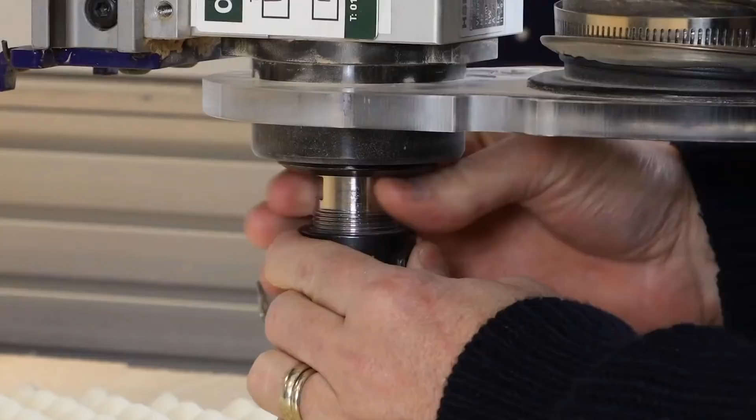So now let's go ahead and take a look at what happened in the labs when I cut these. Following all the safety stuff we need to in our labs, wearing the mask, using double-sided tape to stick down the Corian, marking the center point of that, and then putting in my first bit, which, as I said, is a V bit, cutting these in the reverse direction for my actual male parts.

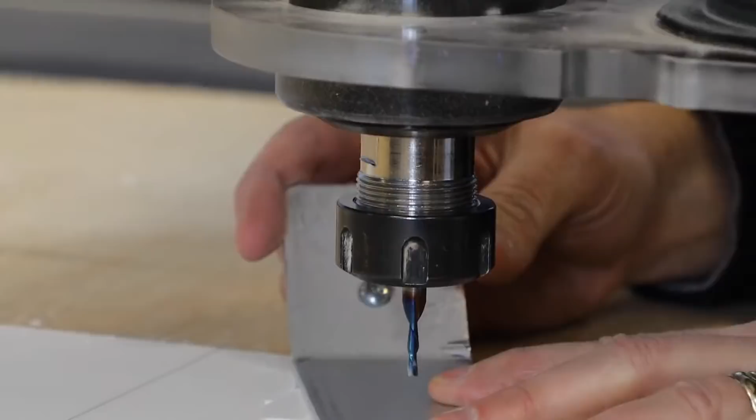That worked out. Corian, by the way, if you've never cut it yet, it is really quite nice to cut. It's slick, it cuts really well and very cleanly, and you can see that I got a nice flat edge on the top of there like I expected after I put a nice sharp bit in there. Going in with the 1/8 inch, and as Mark pointed out, this is really quick. It only does the little bits in the corners that it needs to do. And then you swap in your 1/4 inch end mill and do the lion's share of the work here.

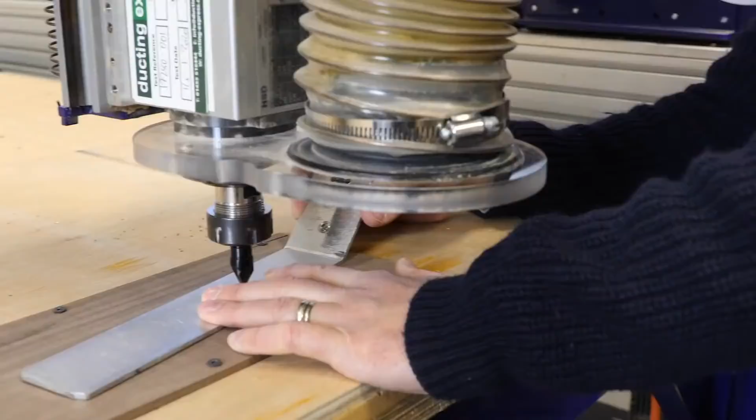Now the reason why I think cutting the V-bit first helped is because it meant that I had some support to hold those sharp edges in before I went in and cleared out all the other stuff. Might be something you want to think about, something you can chat about in the comments, whether or not you think that was why maybe I got chipping, but it did help, and you can see right there that reversing that was a safe process, it didn't hurt anything.

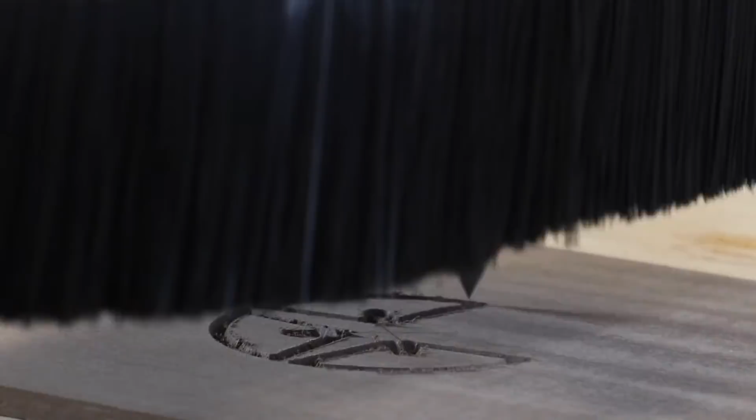And here we did it in walnut as well. You notice that I screwed down the walnut and I also double-sided taped it down. Did that on purpose because the walnut was a bit bowed, so I put the convex part down on the table and I screwed it down to flatten it out. Just ran those same tool paths again, and everything seemed to work out okay in the end.

Then you'll see there was very little chipping. There was some interesting folding of the material, but I think that was just that I didn't clean it up very well when I went to glue the two together in the end, but I think it worked out really well. There we go. And then the chipping that did happen was at the base of the V-carving, so it didn't matter anyway. That was in the inside of the actual inlay, so you didn't see it in the end.

Now here we go. We're actually going to cut the snack tray. Now we cut two of these. I wanted two different samples like you saw. I wanted to try the Corian out, and I wanted to try the wood out and see which one looked best and which one worked the best.

This is the roughing pass with that 1/4 inch end mill. Worked out really, really well. Swapped in the ball nose end mill, and that was perfect. Went along and made sure I had a nice cusp at the bottom of my shapes that I created there.

Standing safely behind our glass there to make sure everything is safe. Check that out, everything looked good. A little bit of pre-sanding before I went on to the next part. As Mark said, it's always good to sand before you take it off your wasteboard if you can. Went in, there's the 1/4 inch clearance, and then comes the 1/8 inch clearance for the female part. And then we'll go in and swap out that bit for the V bit and do the last bit.

And again, that looked really great. I did have to go in and do a little sanding in there, which you'll see in a minute, but that all worked out fine. The test fit, everything was perfect. Worked out really well. Nice and tight in there, and it didn't slide around. That was great. Let's go in now and do our profile cut. Get that ready to come out and off our machine so we can do some finishing.

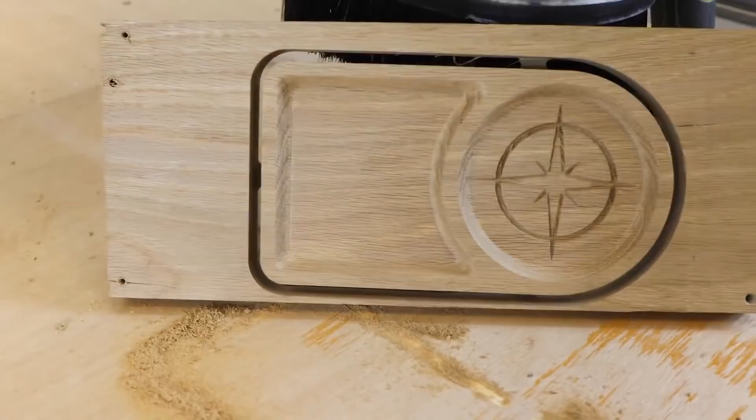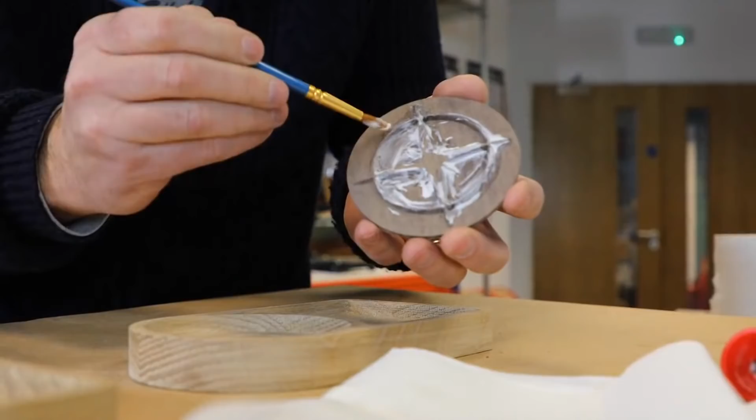Use a little saw to remove it out of there, cut those tabs. And off to some sanding. So I did a little bit of pre-sanding, then we went over to the sanding machine, the belt sander, and we got rid of those tabs. More hand sanding to get those nice smooth edges that I wanted. And then I used some wood glue to glue in the wooden male part into the snack tray. Used a little bit of a paintbrush to put that on. I suspect there's probably an easier way of doing this, but clamp that on.

And then to put the Corian in the wood, I used a 2-part epoxy. Mix that up. Now this was a bit of a pain to get onto this bit. There's got to be an easier way of doing this, and I'm sure you guys can kick around some ideas in the chat room on how I could do this better next time. And then I clamped that in there, and we set that overnight to dry, and came back the next day, and I fixed the jig up to the CNC machine so that I could make sure that both snack trays were in the same spot. So I just needed to zero the center off of one of those pucks, and then when I swapped out the trays, everything would line up where it needed to be.

Pop those off. The next thing to do is to add a little teeny bit of finish to it. You can see I went a little deeper and a few pieces were missing there. The extra depth was because I didn't zero off very well, but it did work out in the end okay. I used a little bit of Boos Block on there. That's mainly used for chopping blocks so that it's sort of food safe. Wiped that on, let it sit for a little bit, and then wiped it off, and the finish turned out really, really nice in the end, I think.

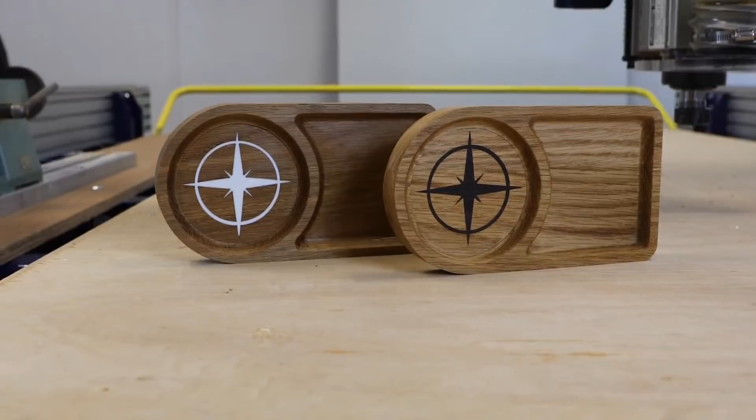Okay, there you have it. That was me cutting that. Learned tons of stuff on there. And like I said, one of the things that I learned was that choosing the proper toolpath strategy when you're doing things is really, really important. And you want to make sure that you choose the right one for the job. Okay, that's really important. So if you're new to VCarve inlays, I totally think that you should try this out. Go and look at Mark's files and learn how he did it, and then maybe even take it a bit further and use my files and go ahead and cut yourself a snack tray.